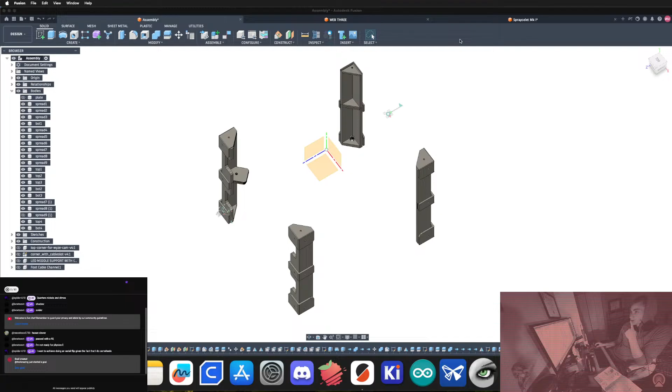You're not ready for physics. You are ready for physics. You really grasped calculus. I want to make that clear. It was very impressive. Yeah. Let's see here. So yeah, I'm happy. I'm ready. Excited to help you with physics. It's gonna be great. Okay.

I think that we're going to keep going here. So if you weren't here earlier, we've been working on basically redesigning the web from scratch based on what we've learned to try to make it sleeker, thinner, more comfortable, easier to use, all these things. Because before, I had this design that is kind of old school and outdated when you take it with all the other things that I've learned since I first made that design. And those other things just don't fit anymore.

So for instance, like adding this extra little bump here so that I could fit the trigger slot through. Now we've got the trigger slot pre-baked into the shape of it so that we can design around it from the outset instead of trying to tack it on later. And this will culminate in a new pressure vessel design that is sleeker. We can hold more fluid than ever before. You can see we're elongating this a little bit, but all the mechanisms are also going to be hidden so it doesn't look crappy. And yeah, that's pretty much where we're at today. So I hope everybody's ready for what's to come.

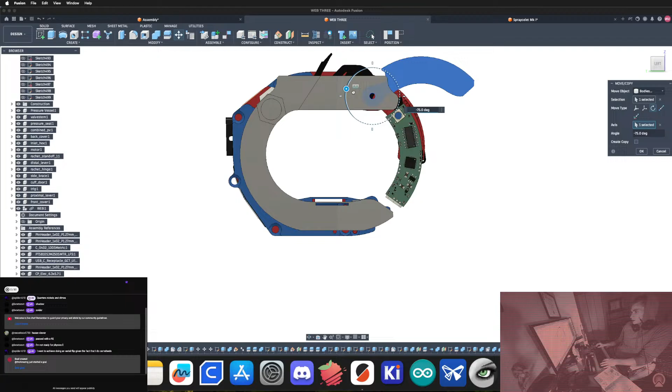So where I was before is I got the hinge working here. And I think it's going to basically be this shape, and the angle that we're able to move it to is 67 degrees, and that's a complete coincidence, by the way. Complete coincidence.

Funny you're talking about aerial flip 610. I was just talking to my parkour buddies, and we were talking about aerial flips. And I have more, I guess you'd say, gymnastics experience than the rest of the parkour guys, so I come at things from a little bit different place. But they were talking about aerial flips, which of course is the classic gymnastics move. And they were like, it's crazy how female gymnasts find an aerial flip so easy and standing back flip is more difficult. And I think that's a little bit misguided because I think both are easy to them. But the thing with the aerial flip, if you're just comparing one skill, right?

Aerial flip versus like back tuck, or if you're just comparing the aerial flip, like men versus women, right? Women are generally more flexible, and what that means... well, I'm sorry, I'm trying to turn off the preview on

enable preview. There we go. Okay, we don't need the preview on the OBS.

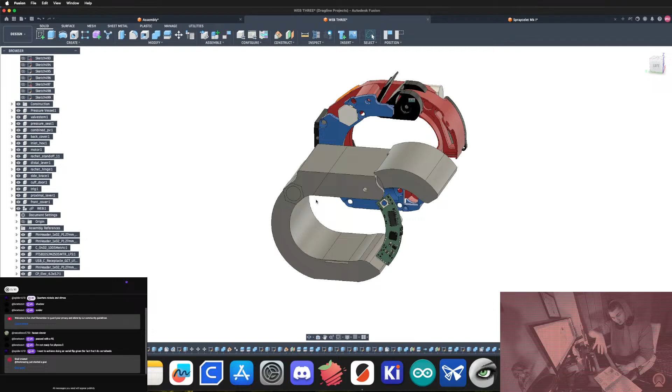Okay, so women are more flexible. And so the thing is, if you're doing an aerial flip, flexibility is really helpful because it all comes from just like a cartwheel, that leg going up behind your head, over your head to the other side. This time, instead of a cartwheel, you're not putting your hands on the ground. So it helps a lot when your leg is already halfway around to reach the other side before you even left the ground with your leg that's doing the jumping.

That's how I've imagined it, and I've never been able to do it. It's probably how I would coach it, but I think flexibility is a great help for that sort of thing. So definitely stretch a lot. Try to get your middle splits or your front splits or whatever.

No, Henry, I don't really make my own PCBs on a CNC. I could do it if I was in a pinch, but the fact is, PCBWay is cheap, it's easy, and if you're just doing the PCBs and not the components, there's really no reason to do it because it's dirt cheap and it takes just a few days to arrive. So there's really no reason to do the PCBs in-house because that's an extremely accessible service at this point.

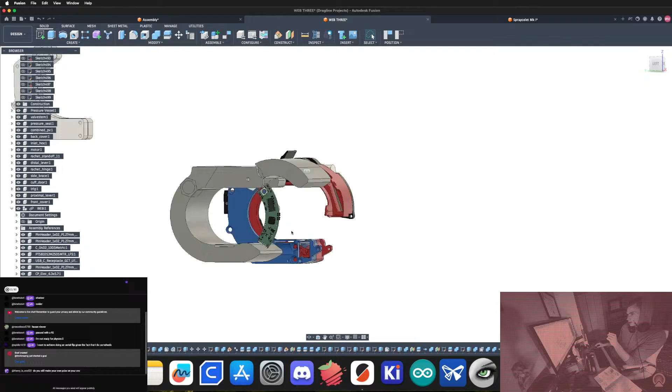All right. So enough chitter chatter, enough jibber jabber. I'm in the middle of designing an adjustable bracelet. I'm not worrying about anything else at this moment. That's it. So given that, hopefully I'll be able to print it, because this only has an hour and 39 minutes left. So we basically have an hour and 39 minutes to get this done, and then we can print the prototype in PLA, see how it fits. I think that would be really cool.

Let's see here. Let's move this back, 67. Okay. So. I sort of have to think about what is the range of motion here. You can see I've got a bunch of sketches here.

Hey, how about that? Another scholarship. Congratulations. That's fantastic. I am super happy for you. That is huge. It's like that's so huge. Crazy, like world of difference that can make. I'm extremely pleased to hear that. That's awesome. I don't have any Bambu Lab printers. I have a Prusa and I have an Anycubic, and that's it for FDM at the moment. Damn, 610, that can happen. That's why you're organizing change. Oh, man.

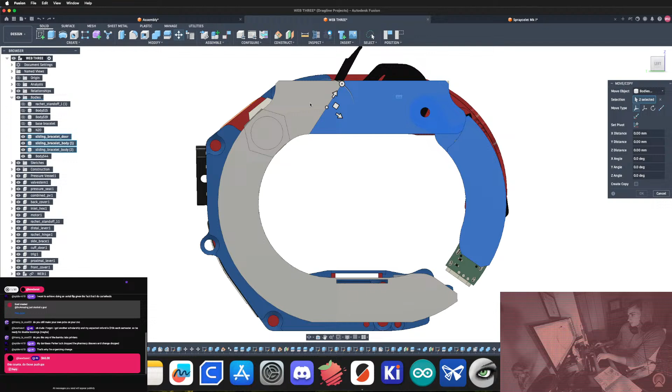Let me move backwards. I want to think here, because if this is considered the neutral position, this is what's going to fit my arm, my wrist, then we're going to need some bigger wrists and some smaller wrists. In that case, if we go here, bigger, let's say maybe 5 millimeters bigger. And let's call it... you do really need it. There's some tiny girls out there.

Holy shit, dude. Dude. Shadow. Thank you, my man. Holy cow. You're right, it absolutely does count. And I got to do those push-ups now. Holy moly. That is super generous. Okay. You got me. Everyone thanks Shadow for doing the most. Wow. That definitely counts. Okay. Forget that. Wow. Okay. Here we go.

Now keep in mind, I've already done 100 today. I'm going to put the mic on the floor next to my head. And I hope you guys can see this. It's not the best. I know that my camera is weird. And trust me, that's not my fault. Get the lighting over here. Okay, there's the floor.

Easy way out, that is true. Okay, I think you guys can see me. Yeah, this is pretty visible. 60 push-ups. Okay, I did 100 earlier, but not all in a row. So I might still have some stamina. Maybe I'm even warmed up. If I can't do these all in a row, please don't blame me. I'm gonna do 60 though. I'm gonna try to do them all in a row. Okay, here we go, here we go.

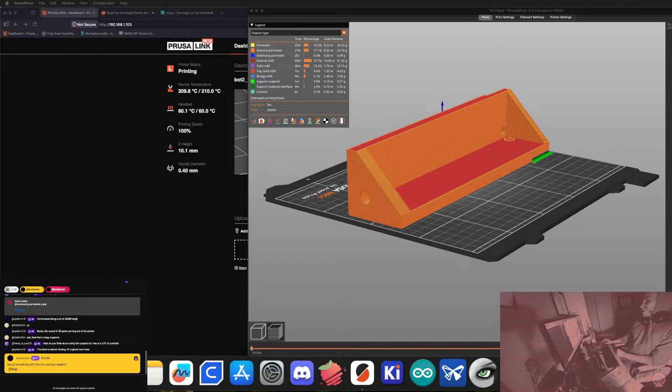Hey, Shadow, come on, man. Just because you got this scholarship, you can't be just chucking this money at me, man. But I appreciate it very much. It's gonna help a lot. And this does count towards the goal, by the way, towards the 20 dips. That's very sweet that you would say that. That's very generous. So that means $5 more until I have to do 20 dips. Oh my goodness. Okay. Shadow is making me work. I'm getting sweaty too. Oof. Luckily my AC is on. I need to turn it up. Oh, I gotta move this one back too.

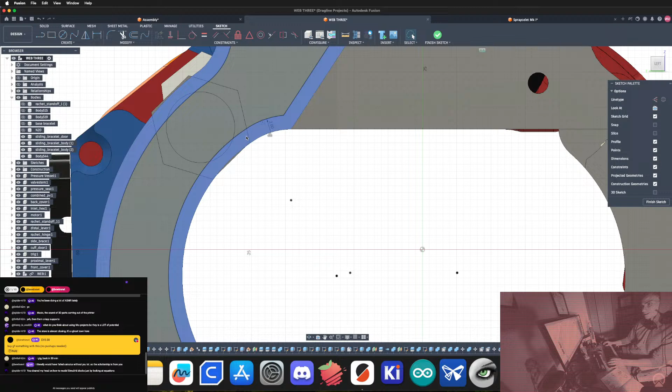You cleared my head on how to model Simulink blocks by just looking at equations and how robot manipulation is mapped to Jacobian. That's one of the things that I helped 610 with, and it was a lot of fun. I'm glad that I could help you with that, dude. And it's cool stuff too, especially Simulink. Simulink is one thing that I remember from my...

I think we first did it in my junior year, like signals and systems and introductory controls, modeling Simulink blocks, modeling systems with Simulink. And I remember being in those classes and being like, oh my gosh, something clicked. And then you get it, and any problem someone can throw at you, you can model in Simulink.

Almost any problem. That came to an issue when I started to have to deal with multidimensional partial differential equation systems, like you get with fluid dynamics, and suddenly Simulink doesn't play much of a role anymore. But I was still able to use MATLAB to write some solvers for these partial differential equation systems.

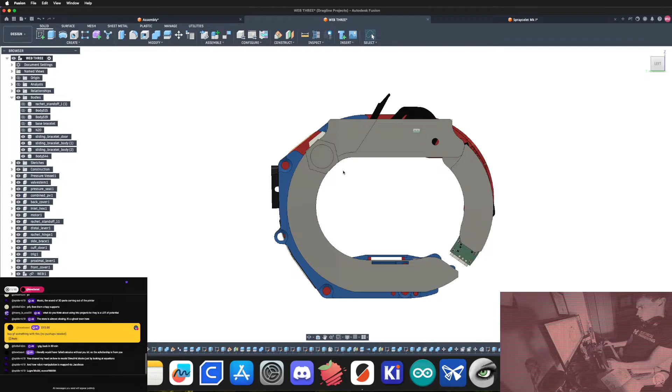I think this one works. That's much better. All right, let's see here. So, let's go back to the sketch. We've got to basically draw another line here. And this will be parallel to that. And then we alter this one.

Now that fits, that can slide past, but we have the issue where there's a little sharp part. And so we'll add a fillet, and then maybe this whole thing was for nothing. I don't know. You see that? So that keeps the shape of the wrist a little bit. There's going to be a gap here. So hopefully no pinching. I don't think there will be any pinching. There shouldn't be anyway.

And I'm going to fillet that one pretty generously. 1. Is that too big? It's a little big. 0.7? 0.7 I'll do. It's pretty generous, but I think that's what I need to do to prevent the pinching. So that compresses the top of the wrist there.

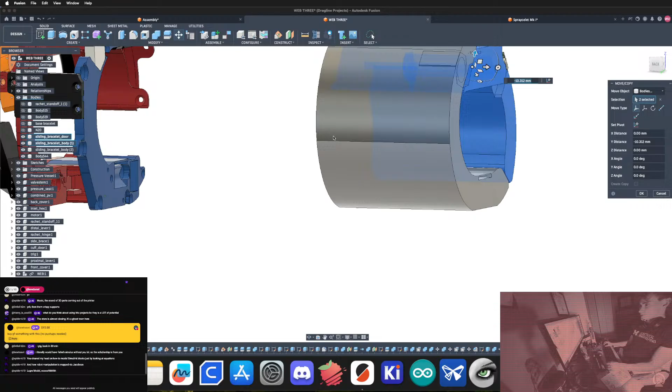So the problem is, for really skinny people, this is going to have a part poking out here. But no one's going to be this skinny, surely, right? So it's going to be like here. And then that's not too bad. And then maybe I will chamfer this so it doesn't seem so crazy, you know?

But that will come later, because this is the motor compartment here. So we're actually going to need a decent amount of space. I don't like doing the details right now, but what did I just do? So I'm going to make this one go backwards by 19. No, backwards. 19 plus 0.8. Thinnest wall thickness there.

We'll probably need a little bit more than that. But maybe not. Okay, I'm going to take this motor now. Make a copy. And I'm going to move it until it gets to where it needs to be. Like, let's say here.

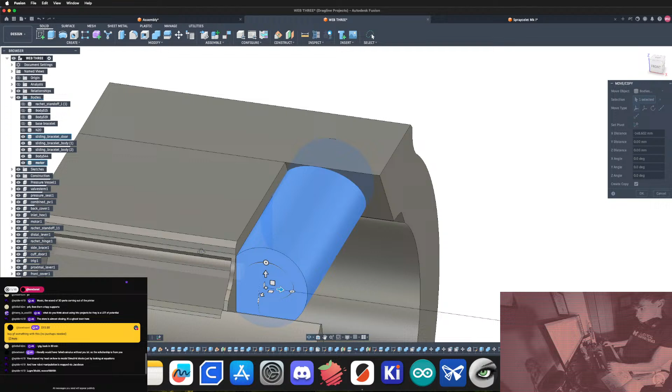It's pretty well hidden. Yeah, that's the other thing that I'm doing with this, is the motor being embedded instead of exposed. So I think that's pretty decent. Yeah, I'm a big fan of that. Does it interfere with anything over here? Not really. Yeah.

So if we make this motor go here, I want a specific number, not just a random place. So let's just say, because I don't need to actually put the motor in right now, I can keep that separate. I just, like, this wall right here, make it bigger by like a millimeter or something like that.

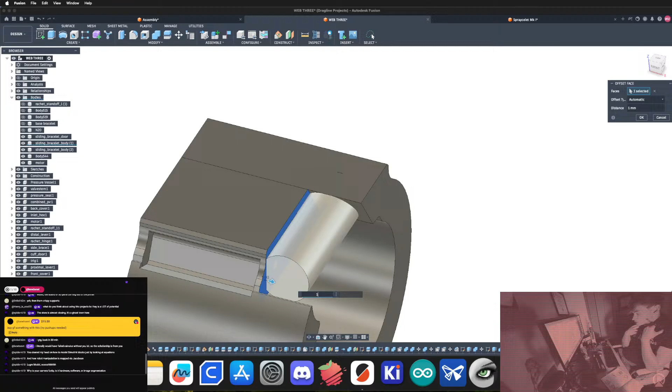So the camera's funky. It's originally green. So in OBS, I made it look less offensive and just kind of gave it a sepia. And there's these lines going across it as well. That comes from my webcam software. I don't know what's going on. I think there's like a driver incompatibility, because I've done some janky kind of jailbreaky updates on my computer, which have led some things to break. And I think that this is one of them. So we're just going to have to live with it. But I'm like black and white. So it's kind of like Spider Noir, you know what I mean? It's good, with the times, like a nice contemporary activity to have a black and white camera.

So this is now 1 millimeter. Unfortunately, I think that we might need 2 more millimeters. Can we get away with that? It looks like we can. It looks like we totally can. So let's keep that.

Because this will probably have a nice little counterbore. 6.5 millimeter counterbore. That will go down 3. And our hinge screw, maybe 2.5 is enough. And our hinge screw will be poking towards that. And how wide is this actually?

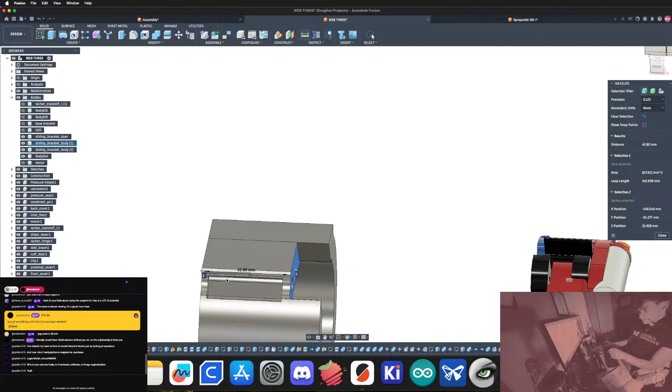Oh, perfect. Holy cow. I could not have asked for a better... Actually, it's not perfect. It's nearly perfect. But it's not the worst thing in the world. I think I have fasteners that can make this work. And what about this one? This is 3. I want to point out that this hinge is pretty overkill.

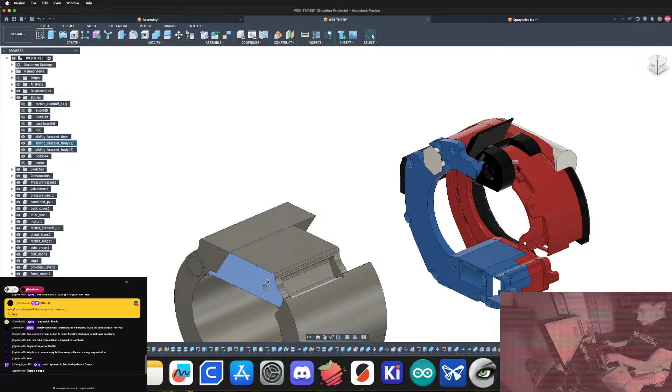But if I take this one, I need to move it back by 1 just to make this symmetrical for the prototype. And this one and this one, and move it forward by 1. Then we can have the same setup on the other side with a 6.5 millimeter wide, 2.5 millimeter deep counterbore. Booyah.

What happened to Blood Spider and Friends? Blood Spider is still kicking, man. He did like a podcast episode. Remember? And then he was going to put me on it, but I think he forgot. So I don't know what is going on there. But I think he forgot.

0.5. 2.5. Yeah. Okay, so we got space for our hinge screw here. Good, good, good. That's important. The next thing is that we actually kind of have to have the motor compartment rigidly attached to all the moving parts.

Not doing push-ups at night, that's what he's not doing. That's funny. Yeah, he's still working on his fan film. He's super passionate about it. And I mean, it looks like it's going to go well. We need more of that stuff in the world, you know, people being really passionate about what they're working on.

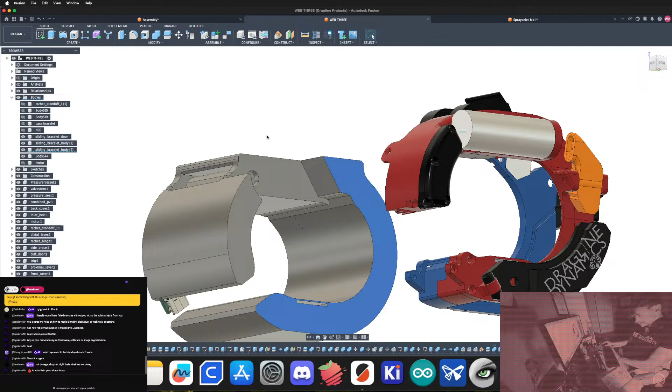Okay. So my contention is that we need to recreate this slot. And then here's kind of what I feel like doing here. Let's take this one. We take that. It's already there. We take this. Okay. So that's all going to be part of it. But then, because these are going to have to slide past each other, I want to find something here.

Okay, we're going to just construction line all of this. I got to remember to do that. It's much better practice to have your guides all be construction lines and then make the outline after you know what the shape is going to be. Okay, coincided there. Okay, so it's all coming together now. The only question is, get this out of the way. It's old news.

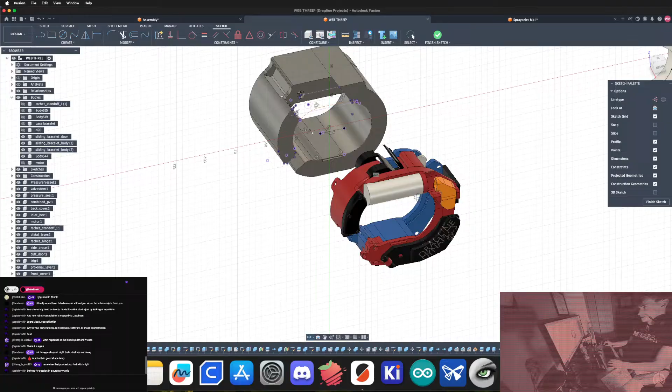If I were to get this and this and this, okay, maybe I'll trim this one. So if I were to get this and this and this, and this, and I were to copy it, paste it, and then rotate that shape around this circle, what do I get? Does it interfere? It looks like it will interfere because it's crossing itself, this line. Mm-hmm. Okay.

Now, why is this a problem? It's a problem because I'm not doing this right.

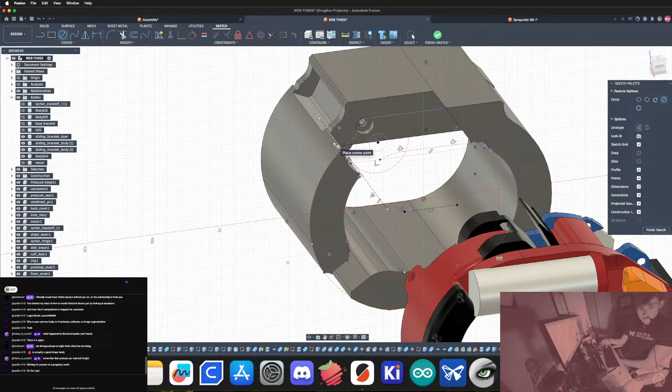I remember the podcast I had with Knight. Yeah. Those were good times. Those were young times. You know what I mean? I suck at working with people. I wish I didn't. I was just talking about this to a friend. But like, God, sometimes I don't know how to handle it. I would love to, I mean, part of it is resources, right? To be able to collaborate with people, you need to be able to sacrifice a little bit more. Because you're sacrificing for each other, essentially. And it's hard to do, you know.

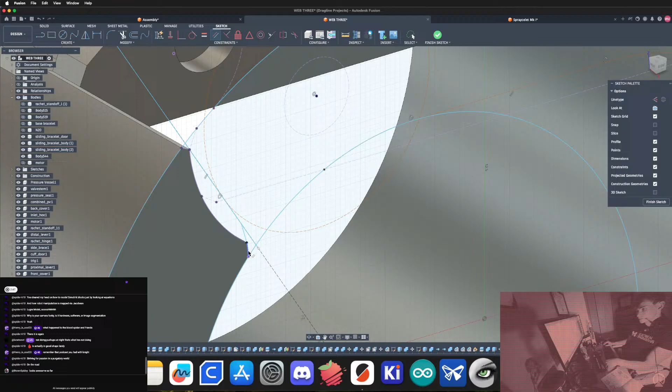One here. And that's it. Just that shape. We're going to go there. It's going to be a new body. And then we're going to combine the bodies. But wait a minute. But then that kind of limits the adjustability of it, constraining this to be a flat surface here, when really you just need these things to slide past each other, but also be able to rotate. It's like a knee joint, right? The knee is a really interesting joint.

Oh my God. Like a fry and ketchup. Get out of here. My girlfriend would love that one. She loves ketchup on her fries.

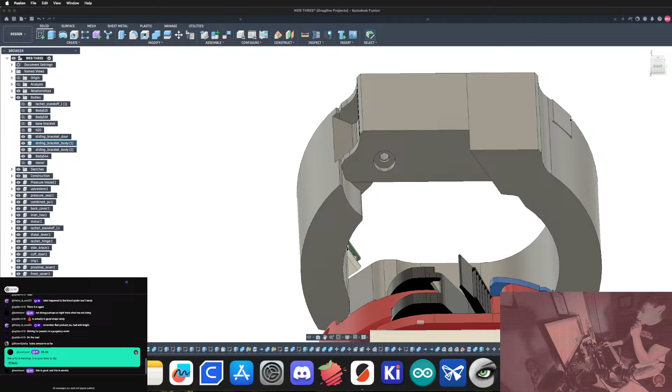This one here. Instead, I think what I want is, no matter what. Maybe I should draw this first. Okay. Should draw this first. Right here. Right now. First things first, this part doesn't slide.

Hey, congratulations 610 on finishing another shift. That is big news. It's not easy.

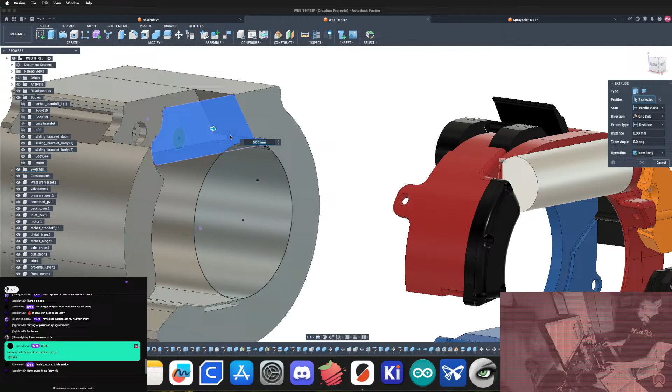What I missed here? This is part of the fillet. So if I just do a tangent arc, and then make it also tangent with this, and it's fully defined. That's the shape that I'm missing. And that's where the motor goes. So this shape is what we're trying to recover here, part of the bracelet where the motor will sit. Go here, new body. And then we will combine this and that. So now what we have, which is kind of wild, actually.

That's 16 millimeters. It would be nice to have a little bit of a pad down here, but I'll ignore that for now because there's still so much area to press down on the surface of your wrist that it might still be comfortable.

Dude. Yeah, I bet. Tell me about it. I don't know why some people are so entitled when they're customers. You know what I mean?

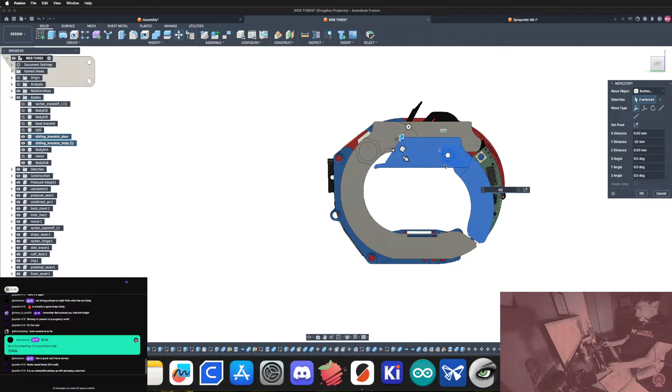Okay, so this now will slide like this. Let's say to the maximum adjustment of 10 millimeters. And ignore the PCB over here. That's sort of the shape that this will take. Also, as a result, you know what? I'm going to do it. First thing we're going to do, move this up by 1 millimeter. It's just 1 millimeter, right? What's the worst that can happen? I'm just trying to make this more comfortable. Move this up by 1 millimeter. Move this there to make it match. Okay.

Ah, you're the photo expert. Very Peter Parker of you. Love to hear that. That's very cool. Help people a lot when it comes to photo orders, literally IT support. Yeah, I bet that's confusing too because it's hard for a lot of people to understand, I bet, you know, when that technology can go wrong.

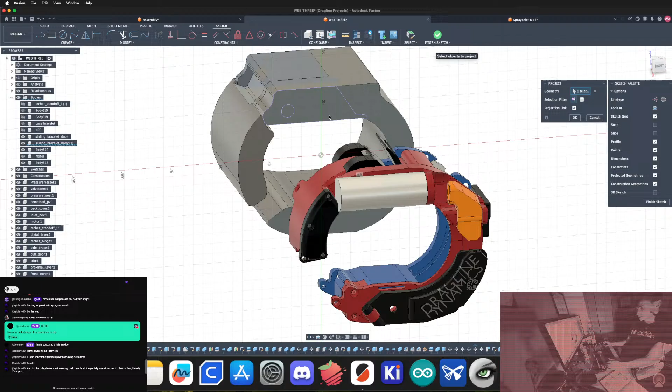So that's the surface. And if I get this and that, -1. You see what I'm doing here? 1 millimeter is kind of thin for something like this. But this doesn't have to be 1 millimeter all the way through because the motor is curved. That's kind of an advantage. So I'm just going to move this through to here.

And it's going to be a new body. New body. And then we're going to cut this body with that body. Keep the body. The word body is starting to sound very weird in my mouth. Then combine this body with that body. Don't keep the body.

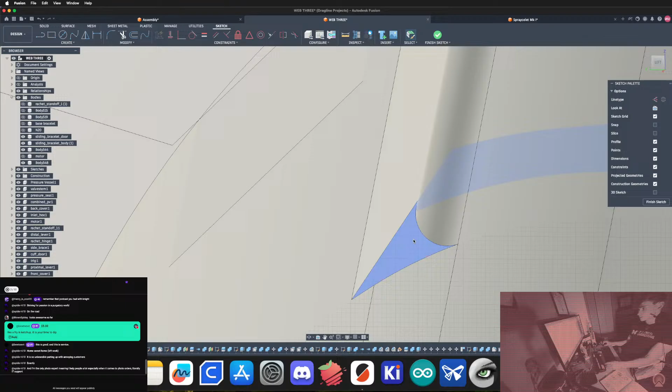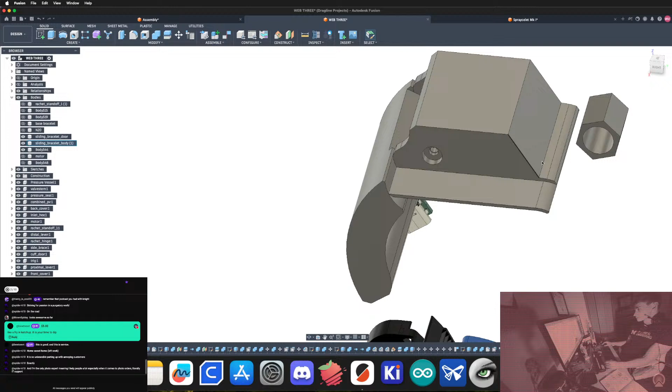Now the whole surface of the top of your wrist is going to be pressed down on, and not just the back part. The motor has to be raised up a little bit to make this happen, but nothing crazy. Nothing insane. So I think that's going to work better. Let's see what that shape looks like here. Yeah. Okay. Great. So that's that part.

What are we missing? I think we're missing a limit and a guide. So for instance, if we want this limit to be 10, and I was thinking that these two surfaces here are parallel, but I think it's entirely possible that someone may want to adjust this like to here. And in that case, we have a little bit of work to do.

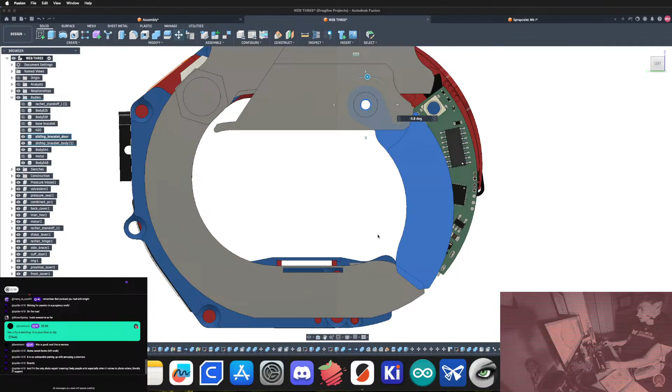So I think what I'm going to do here, because that is kind of a shitty situation for all involved, I'm going to draw a line to cut both of these surfaces, sort of going through the intersection points. And then exit the sketch. Excuse me. And then we're going to split these bodies. This one, using this tool. Okay, then we got to reconstitute this one and this one.

Shadow's killing me, dude. That's hilarious. I don't know, man. What does have me so thirsty? That's so weird, you know?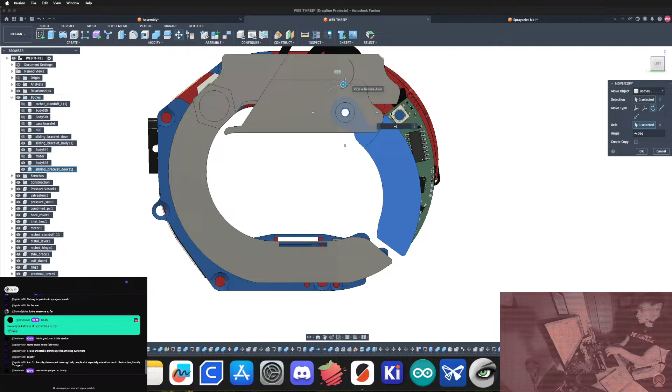Okay, so only problem is I don't remember how much I rotated this by. .8 degrees. I'm going to round that to 4, just so I know the number. Okay, didn't seem to cause any catastrophic problems. What that means, we can go back to 4. And this one, back 10.

Really interesting. So we have a little tiny struggle here in terms of how to mount this brilliant PCB that I have from PCBWay. I basically just made the smallest one I could with all the components I needed.

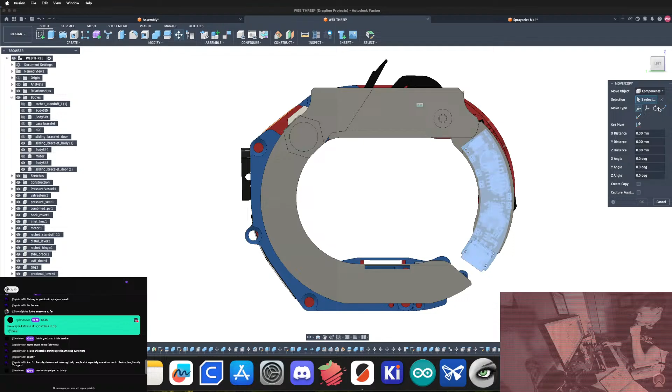It'd probably be better for this to be like up here. Even like sticking out a little bit, I think is okay. I don't think that's gonna be catastrophic for this design. Maybe like here, you know? But then we've got it sticking out over here.

So I think, we might have to do some work up here, but let's make sure first that that is adequate for the adjustment capability. And maybe we can get away with a little bit less. Let's do it that way. So I think move this one first 10. Dude. That's not bad. That's not bad at all.

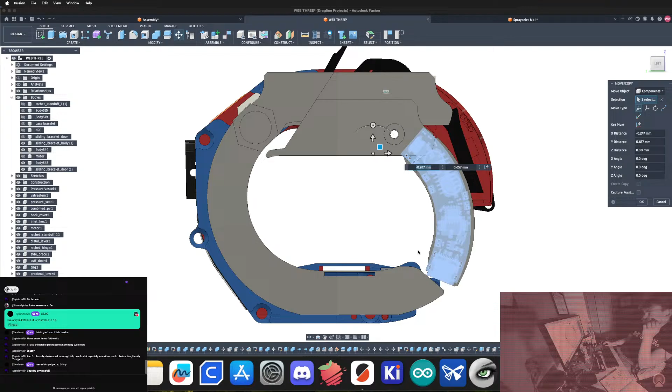It sucks that it's not the same perfect circle, you know? I did not design this PCB perfectly. But I did a really good job, I promise. I mean, this is okay. What's gonna suck about this is this nice smooth surface is gonna be a little bit interrupted. But it's probably not gonna be that big of a deal. What's going on up here? Although, wait, think, Mark. Okay.

What also sucks is that the LED is now hidden behind another part. But maybe it doesn't have to be. Oh. Let's see here. Doesn't have to be. Could be a little opening there.

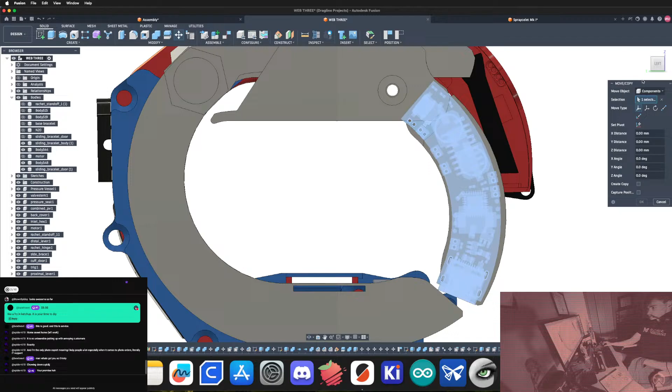I'm not going to make a space for the PCB here, but I am going to make it the shape in which the PCB can fit, if that makes sense. So the first thing to do is to, I think, laterally move this PCB to a place like here. So that's sticking out there. But don't forget, it's not that big of a deal.

I think 3 is a magic number. Yeah. Oh. All right. The PCB is pretty snug. Yeah. I think any way you look at it, everything about it is pretty snug.

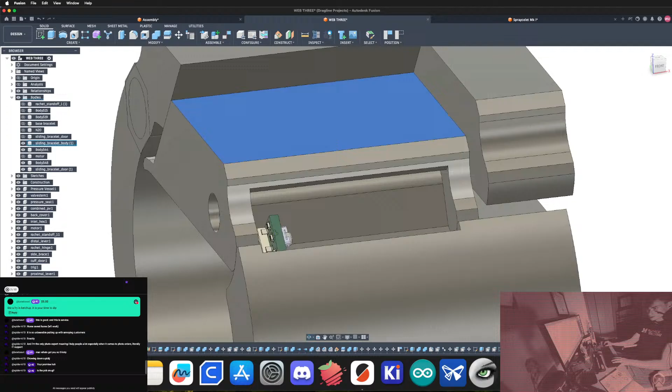So now we have a situation where, keep in mind, the PCB is not in this current formation interfering with this other part. So I'm going to erase that, and we're just looking. Let's just isolate this, and we'll just work on this part. Okay. Remove that.

And so we're just looking here how to get this PCB to fit properly in this part. And I think what we're going to do is keep it simple, stupid. We're just going to take this shape,

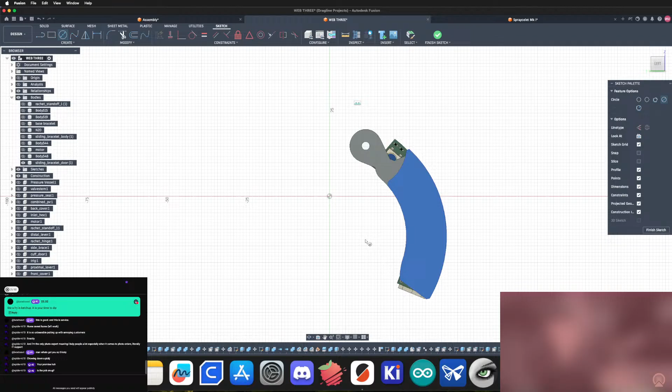Fusion 360 would respond to me. That would be quite nice. It would be nice if Fusion 360 responded to me. What happened to my camera? There it is. Okay. What the fuck?

What circle am I looking at here? This one and this one. Pretty tight.

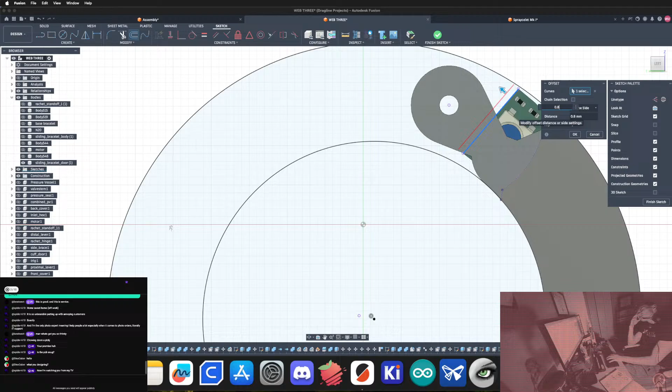I need to project some shapes. Although, remember, you are not building space for the PCB. You are just making the shape more accommodating to a PCB type shape. I'm conflicted. Okay, we're going to do that. We're going to do different arc.

I'm designing the Web 3. That's what I'm working on here. Going back to basics, but also essentially just taking everything that I've learned over the past year and change about designing this device and then applying it to said device.

Wait, that kind of sucks. Hold on. Hold on. Get rid of that. This really should be coincident. There. That. There. And all this crap. Tangent arc.

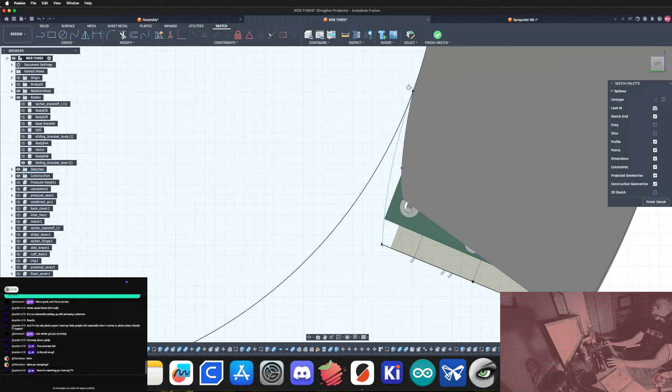So that's tangent, but they also need to make them concentric. And that one and that one. And as for this one, new tangent arc from here to here. Here to here. That's probably good. Like, that's probably good. Let's go covering this PCB here. Does that even make any sense? I'm gonna go with yes.

New body. What we're gonna do is we're gonna pretend this was the plan all along and never have anybody know what this looked like before, to hide the fact that I made an oversight on the size of the PCB. But then the problem is we gotta make it look natural. So hopefully it looks natural in the next couple scenes. It might not. It might not.

Okay, then what I'm going to do, combine. This already looks a little like shit. What happened here? No, really, what happened here? I thought this was... Did I miss something? Oh, I just forgot to extrude part of it. Here. Okay.

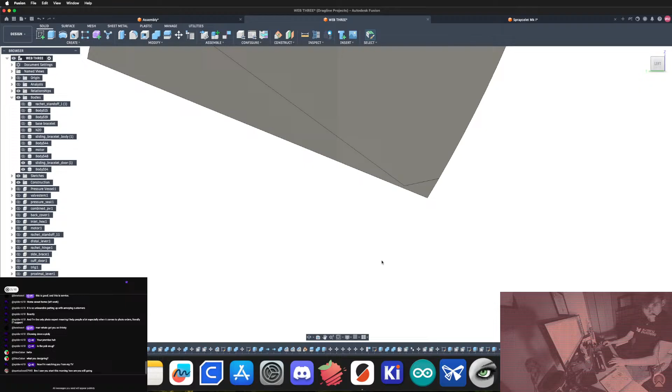I had a pretty sizable break in the middle of the day. So that's why I haven't gotten as much done as you might expect for someone CADing the entire day, where I did some parkour. Go check my Insta story. I made a pretty big jump today. That was kind of scary. But, you know, you just turn your brain off.

And that's that. Did I keep the tool? No, I didn't. Oh. Forgot about this one. Okay. Select that one too. And that one. Hello. This tool, that tool, and that tool. All together. Wait. Okay. Target, this one. Tool, this one. And that one. Whoa, bro. What has happened? Okay. Target. Tool. Tool. Done. Am I tripping? What the heck is going on? Okay. Accomplished a few things here.

I don't like this. We got to make it look natural, remember? So what that means,

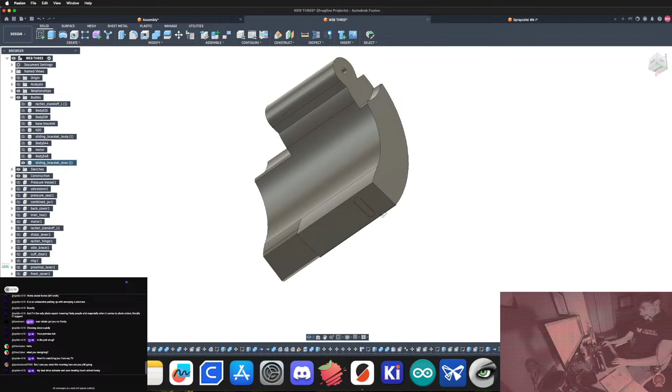Auto leveling touch arrived today. Ooh, is it the BL Touch? I have such fond memories of BL Touch calibration throughout my early years of grad school. It's like I was working with the BL Touch every goddamn day. And it would get so sticky, and then it would break and have to be replaced, and we had to put a cover on it, and then we always had to place the cover on the BL Touch before it started printing, because it was printing sticky material.

Okay, and once again, this is not looking very natural. So we got to fix that. Got to fix that big time.

BL Touch clone. Amazing. Yeah, those are cool. Although, none of the printers that I have now use them, but I kind of remember them being pretty standard. Do you think that's going away? I mean, you obviously just got one.

Okay, I see what's going on here. I'm going to need to do a tangent line.

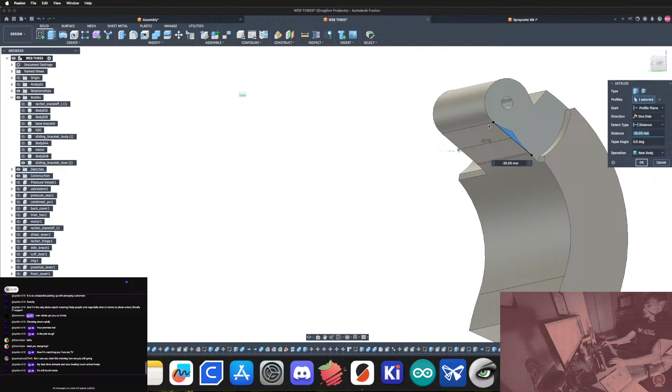Like, I think that the printer I have now uses intrinsic force sensing on the stepper motors. No, I'm dumb, sorry. It has a load cell. That's true, the Prusa Mark IV has a load cell. It's extremely... Did I do this right? What is happening here?

Whoa. What is this geometry? What are we doing here? Okay, I kind of get it. Only thing I can presume here is that we need an arc to go from, what am I doing? Just to fill it. Gosh. No sketch. No sketch today.

Oh. We're getting some buffering in Fusion. Undo. Oh my god. Why do I even bother?

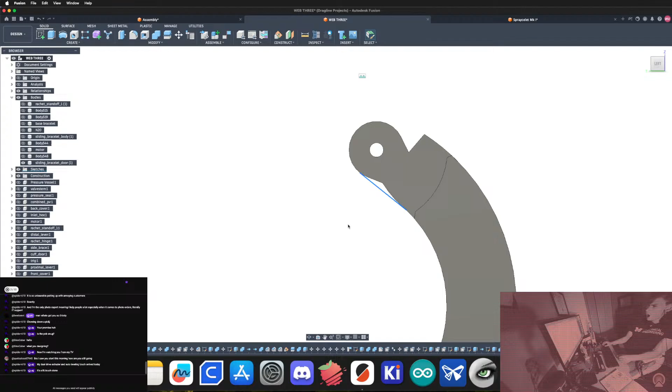We are finishing this sketch, going back to before it was ever created. Deleting it. And thinking critically about our life choices. So we have a few issues here. I guess maybe I'll go for the first issue first.

Start at the very beginning. A very good place to start. When we read, we begin with ABC. Sir, sir.

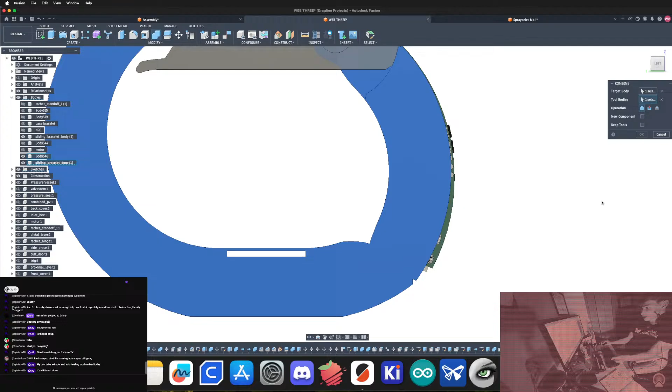Okay. 1, 2 there. Okay, fills that hole. I mean, so the farthest I expect. I don't even know, where are we? We are downward, I guess. We are down here. I'm thinking, remembering how we wanted this to be -4, which means that we now split this body with this body, keep the body, okay, and

10 millimeters, that looks like trash, doesn't it? I don't hate it, but it's just like, why? There has to be a simpler shape here, you know? What am I missing? I'm missing something so obvious. If we get the arc. Okay, we'll just make a 3-point arc between that edge and that circle. Have it be tangent to that, and let's make it tangent to that. Failed to solve. Why? Why failed to solve?

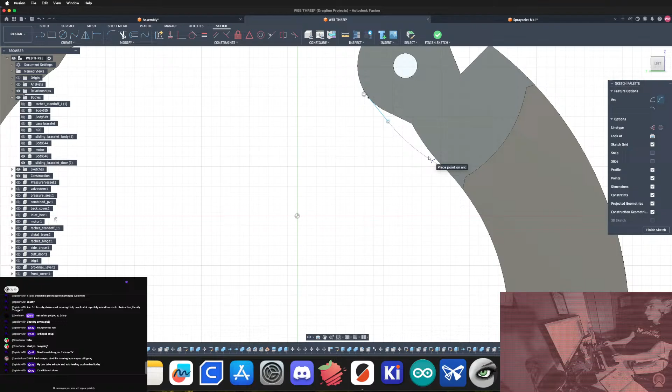Do we need 2 arcs? I guess that's what that would mean. We need an arc and a line. Is what that would mean, right? Okay, line, boom, arc, oh, okay, and then this and this, tangent. Sure. Sure. That's probably the greatest good I'm ever going to get. It's a little bit of a sharp turn. It might not be a big deal.

Then, yes, I'm sorry. I'll just wait for you, Fusion 360. No problem whatsoever. I'll just wait for you.

And play with my Spider-Man Pez dispenser. Which is the coolest thing ever. I want to put some Pez in it. That's what I want.

Okay, so what we have up here, this shape is very not natural. So I'm just gonna real quick, once the buffering is complete, of course, select that line that I just made and delete it. And then once I've deleted it, like this, I'm going to draw a new line. And that line is going to be tangent to this circle.

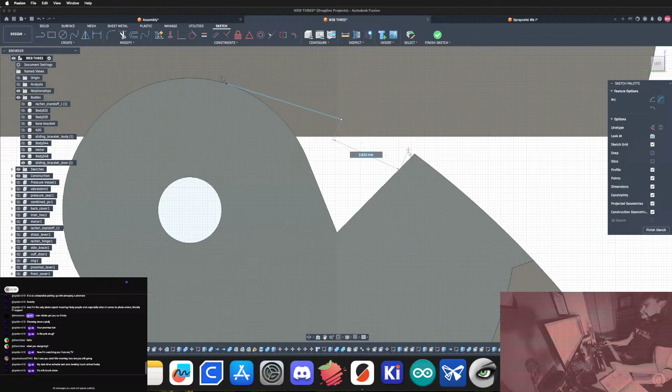And once the buffering is complete, now I can draw a new arc that is tangent to, come on. There we go. I think we got to quit because every time I draw something, it's like, hold on, let me think about this. Personifying CAD software is a very unhealthy thing to do because it's so easy to get yourself thinking that this thing is out to get you with how much it crashes.

Okay, we have done nothing except make this a little better. And I'm going to get this chamfer here. One. Whoa. We're not doing a two distance chamfer here. We're doing an equal distance chamfer. Okay. Okay. Now what I want to do, take this, cut it with this, keep tools. Then we move this 4 degrees, rather, plus 6.7. And we cut again.

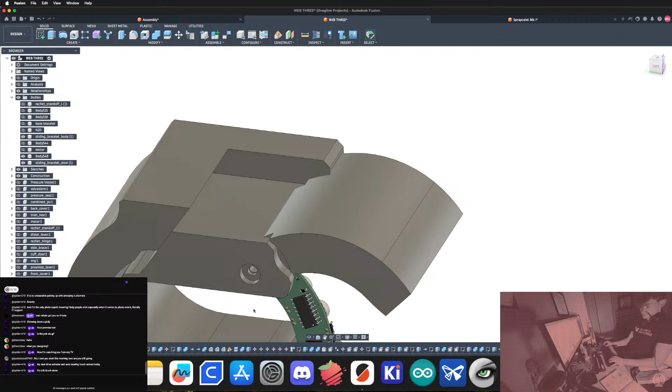The other thing I want to point out is that this is now interfering over here, which of course is a problem that I have had many, many times. How do we solve that? Great question. But don't think too much about it, we got 12 minutes left. Okay, we're certainly not going to make it 12 minutes from now. But let me see what kind of magic I can work. I haven't even done any ratcheting stuff.

Okay, let's move this back down. -6.7. And let's move this up. Not those two. This one up to its neutral position. 10 millimeters.

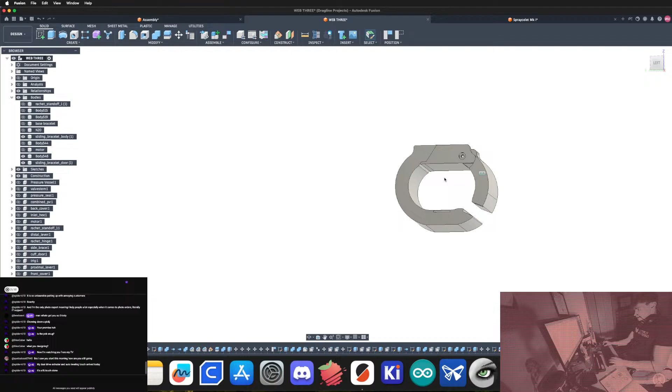Okay. All right, so we're back to the way that this is supposed to look. Nice, very good, very nice. We have a problem.

Select these two here. Maybe just this one. Let's not focus on this one. We'll just focus here. And we're going to set the pivot to, oh, for fuck's sake. We're going to set the pivot to here. And I'm going to rotate the pivot between here and here. Great.

Oh shit, I pressed the enter button. That didn't do anything. And we're buffering, and we're buffering. Fusion 360, I think, needs to take a nap.

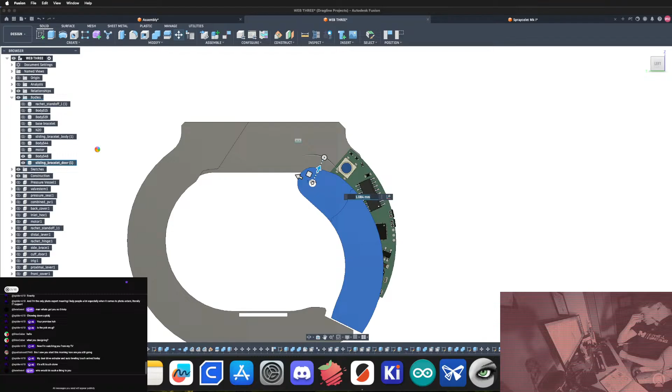No. We gotta set the pivot. Set the pivot to this point, rotate the pivot. We got to measure an angle, measure between flat, slanted. Okay, now I feel like we have it. Shit. Save that pivot. Because now, if we rotate this -4, oh, come on. You don't recall your, are we serious? Okay.

Okay. Select this. Set the pivot. No, not that pivot. Set the pivot. Done. Then, no wait. Set the pivot. Rotate the pivot. Measure the angle between here and here. You got the pivot.

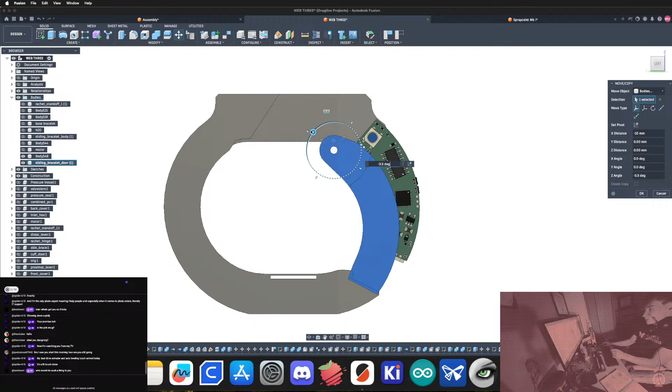So if we go -10, and then we go -4. Are we? I think we're matching up, right? We should be. I'm pretty sure we are. All right. So now, see, that's obviously not interfering with anything because it's way lower. But I think the problem will come when we go way higher.

So we bring this back to 0. Bring this back 10. And we go over here. Okay, and so this is an issue, first of all. There's interference there. There's not interference there, of course. 6, 7. Okay, now I've completely lost the...

Think. We got to think here. We don't want this to interfere. It's interfering right now. We want it to still rotate. We want it to still rotate. Don't we? My brain is not braining. Here's what I'm going to do.

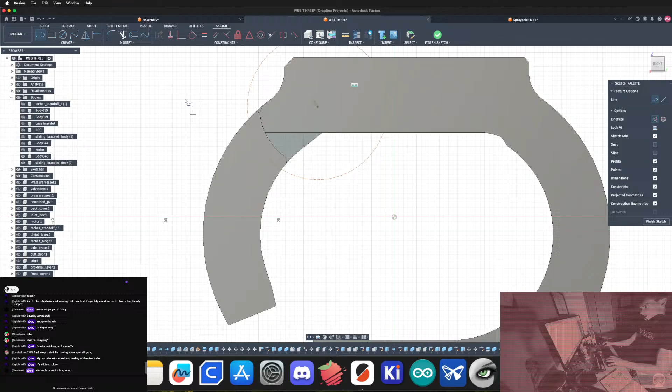Can I get this shape? Okay, offset this shape by like 5 millimeters. Ballsy, I know. You know what? Strike that. We're going to draw a thing. Okay, where's the pivot? We're going to make it look nice, right? That's all that matters. Here's the circle. And we're going to have a tangent line to the circle. That's how we make it look like this whole thing was on purpose.

And then, that's it. No. And then, okay, we gotta wait for the buffering. I love buffering, yes I do, so get me a big old bowl. Rise and shine, it's buffering time.

Okay. That there, make this parallel. And then all we need is adequate clearance. So this is going to slide. Now, we know that. But then as this circle moves down 10 millimeters, this is the geometric solution here to my problem. Why is this perpendicular to something? This and that are parallel, which means this circle, whatever it is, is going to be over here.

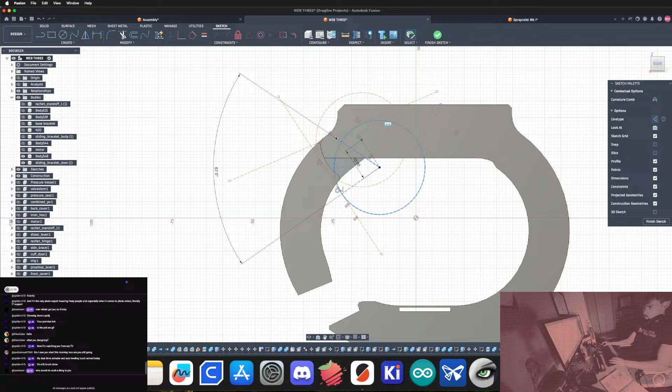And we also know 6.7 is the number of degrees from here to here. These need to be coincident. Okay, so that line is going to end up over here after rotating. And that's going to be at the bottom.

I wonder. If I take this, and this, and this, and this, and I copy them, and I paste them, and I see where those are going to be in relation to the other ones after rotating 6.7 degrees in relation to it.

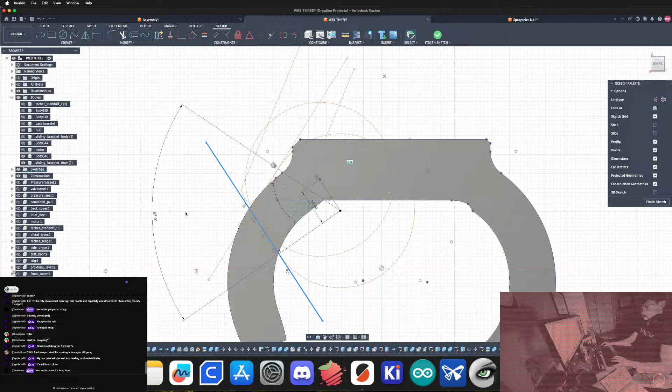I hate to cut out so much material, but it's kind of necessary. And it's going to be okay, I promise. Great. Okay, now we test this. I do want to add some chamfers, though.

This is cooking. So the reason why I made that cut there is so that these parts wouldn't interfere in any configuration that they might end up in, which is quite a few because they translate with respect to each other and they also rotate with respect to each other, which has been so annoying to keep track of what is going to interfere with what. So what I'm trying to do here is get the shape at the outset, and then when I make the minutia and the details, that is not as much of a concern. I'm trying to change my strat, in effect.

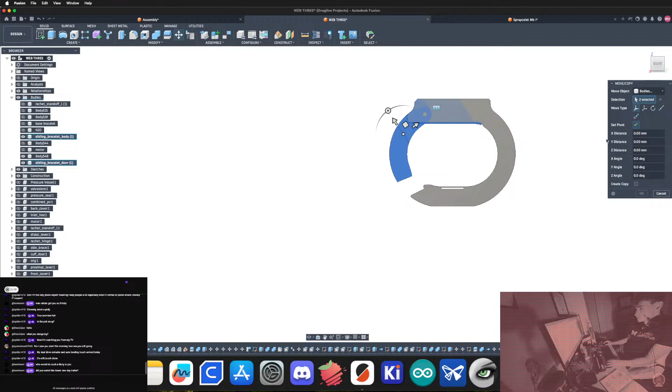Great. Then there's the question of translation. Set pivot. Ooh, this is now parallel now too, isn't it? Okay. No interference on this side. And no interference on this side. And now let's do the full 10 there. Because we got rid of the circuit board, we don't need to look at that. So then it's about, in this minimized translation, is there rotation interference? Let's find out.

Ooh, wow. That just barely cuts through the noise. 6, 7. Hey, it doesn't interfere. My math was correct. This is big news. Big if true. And it's obviously the minimized configuration. So if we move it up, oh, come on, buddy. You're not that guy, pal. You're not that guy.

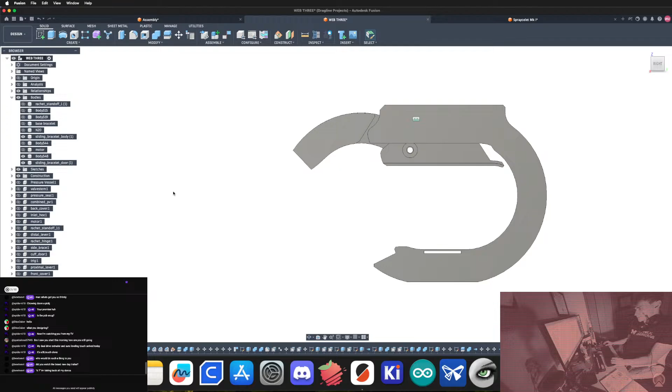Yeah, we are going to be just fine. Okay. Let's go. Let's get rid of the move. Let's go back to neutral position. Go back to neutral position. Good. Great. Wow. We've really done it. 6, 7, like, oh my don't.

It's 67 degrees, Shadow. 67 degrees is the key number for the angle at which this door needs to open so that a person's wrist can comfortably slide in. It was 66.8. I rounded up, but it's not my fault. I just wanted a nice round number so that I could remember it. And it's a very memorable number. So this serves a utility, really.

Anyway, did I watch the Brand New Day trailer? I think there was one. Was there one that came out in the last like 2 days or so? Because if so, I didn't see that one. But wasn't there one that came out like a week or two before that? Because I saw that one, and that was dope as hell. Really excited. And then the newer one came out, and I'm kind of like, I really don't want this movie to be spoiled for me. Because I feel like there's still so much that we don't know about it that it's going to be hard for me to piece together the plot of the movie before watching it, which is what I want. I'm aching for an authentic Spider-Man movie theater experience, you know. That would just be a dream come true.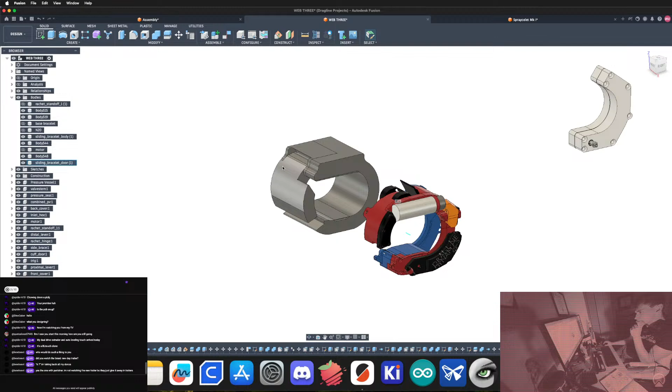It's triggering. You don't like that trend. Man, the Artemis astronauts were doing it, you know? Maybe my sense of humor is a little young for my age, maybe. Usually a big yikes. But I like Seinfeld. That's a damn funny show. And that's for millennials slash Gen Xers, you know? I grew up on Vine. I feel like 6 7 would have killed in Vine. Anyway,

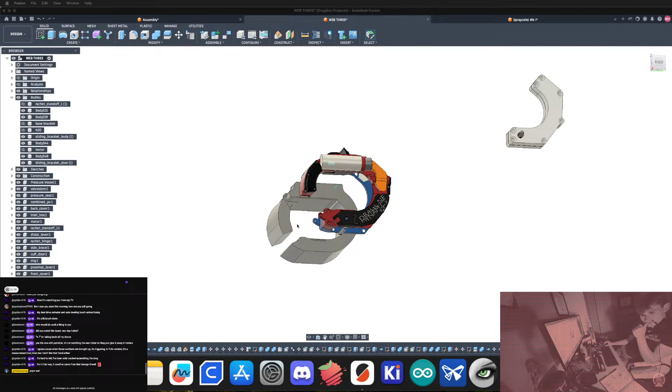Yeah, I do think that this is sleeker. It could have came from that George Orwell. You spelled it wrong. It's spelled like this. All right. I feel like I've got a really good start here. Like, really good. Big Brother 1984. That's right. Okay.

I think I should probably take a break from this because I'm going to need to deal with this other project here. Oh. So I think before I go, oh, Fusion 360 is buffering again. We're buffering again. Okay, this print is done, so that's good. I can start another one that has the brackets included. There's the brackets included. And this is for my new printer enclosure, by the way, that I am designing based on the very classic Lack enclosure.

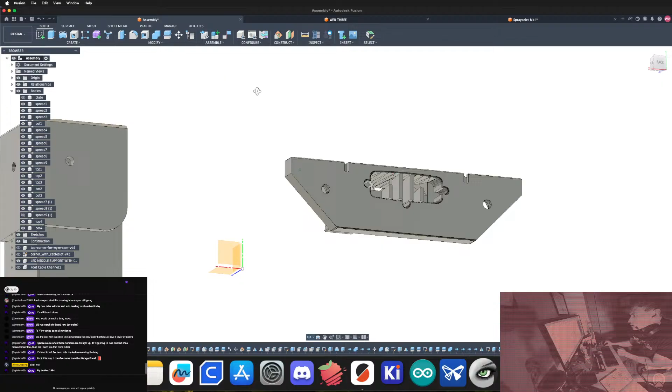Was there something else I had to design? There was, wasn't there? Yeah. I don't know what this is. But I'm going to copy this. I'm going to take this one, get this body. So I know a couple things need to be done with this because I have a thicker plate on the top, so I need to make this shorter by about 1/8 of an inch. I'm just basing this off of this, which is maybe not the best idea.

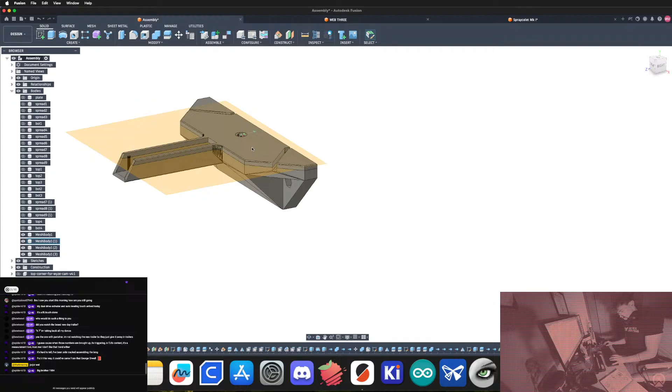So like this, I like that as a cable channel, but I'm gonna need to go minus 1.2, no, minus 0.21, what am I saying? 0.125 inches. And we're gonna cut it here. We don't have to deal with this or this or this. And I'm gonna cut it here. So we don't have to deal with this because that's unnecessary. And we're gonna cut it here. Don't have to deal with that because that's also unnecessary. And I'm just gonna fill in this space. So no one will ever know. No one will ever know what I did.

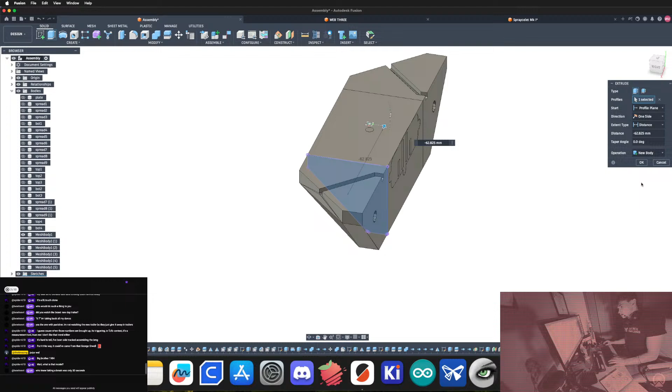Intersect, bang, bang, bang. No, it was selected already. Go here, call it new body. But we still need this circle. Who knew taking a break is only 30 seconds? No, in fact, the break is going to be much longer because I certainly need it. However, I got sidetracked and I need to get this print going. I'm trying to have like a no downtime on my printer, you know, because there's a lot of things I have to do, including the Charlotte orders.

Bang. Sure, whatever. Why is this only 4 millimeters? Is that right? That doesn't seem right to me. This should be 5.65 millimeters. And what am I? Is this supposed to be tapped? No way this is supposed to be tapped, right? I call bullshit on this needing to be tapped. Instead, what I'm going to do, this is a little bit trickier than I thought it would be. I could tap it, and it actually wouldn't be too bad. But I just feel like it doesn't fit with the rest of the design.

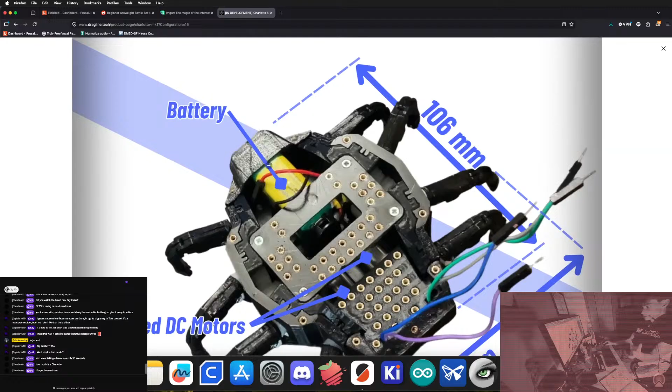So there's a base configuration that has just motors. This is nice for you if you want to add your own battery that will somehow fit in here, or if you maybe sit on top like my earlier prototypes did. This is a very nice, lightweight, very adaptable configuration. See, there's a lot of screw holes here. You can add whatever hardware you want, motor drivers, electronics, controllers, that sort of thing. Then there's the battery configuration, because I found this is actually quite nice. Like, this battery doesn't fit in the original base configuration, but does fit if you organize it like this and put the motors over here instead.

So this is sort of like, hey, this also works really well, so I'm just going to also make this one, and I'm including the battery now with this one, because I think this battery works very well. It's like an upregulated single cell LiPo, upregulated to 9 volts. Jury's still out on how long it lasts, but at the very least, it's a decent starter battery for this to get your project started. So I'm including that with this.

All orders are made to order. Lead time of 30 days. These are the colors that I have, although yesterday 610 wanted purple, and so I decided to buy some purple high strength Polymax filament. That's what all the parts are made out of, high strength PETG. And so I got the purple, and we're gonna make his in purple, even though that's not one of the ones that I currently offer.

But once I get the pictures, I'll probably add the color, because I'm interested in people buying different colors so that I can make the different colors and then have pictures of the different colors to actually show people what it looks like. You know what I mean? And independently, I might make my own colors just for fun, but obviously I don't have the time for that right now.

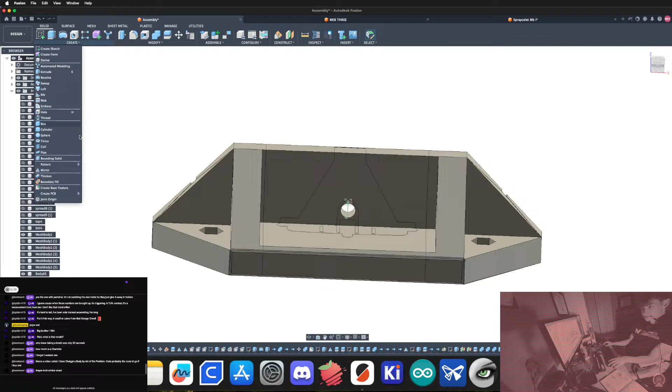Is this good enough? Probably good enough. Now we have to figure out how big these hexagons are so that we can recreate them. 4.677. Don't listen to me. You're going to get upset. 4.677. And do an inscribed polygon. We'll do 4.8. Sorry, I forgot all my geometry. We need a circumscribed polygon. No, we need an inscribed polygon. I did a circumscribed polygon. Okay. 4.677. This seems small. Did I measure the right edge?

Tiny solar panels. I never tested tiny solar panels with Charlotte. There may be a way to do it. The energy consumption might currently be too high. Nope, that is the right surface. But I think it would definitely be interesting. At the very least, you could do solar panels with a battery, because Charlotte's obviously not always going to be moving. Sometimes she'll be standing around.

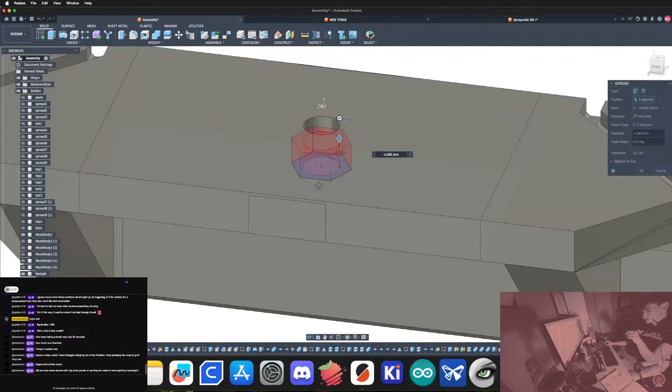Obviously, I envision for her to be like a civilian reconnaissance robot in the future. Obviously, I'm not interested in giving more power to the government. But yeah, oftentimes she might be standing around, so you can absorb sunlight, charge the battery, and then use the battery to walk around. I think that would be interesting to see if that's a sustainable solution. Yeah, it would be cool.

That's the thing. I've developed Charlotte up until this point, and I will develop her more. For instance, I've been talking for a really long time about a reinforcement learning algorithm that I've been thinking of. That's probably what I'm going to do next with Charlotte. And then I can start to figure out her native controllers and that sort of thing. The stuff that, once Charlotte is a full robotic system, will be included. And then it's also keeping it relatively affordable, disposable.

I know that for your typical hobbyist like you guys, $200 is not disposable. But if I'm thinking about a fire department, they need robots for sensing. Basically just getting sensors places where humans can't go. Am I keeping tools here? I don't want to. Yeah, I am. I'm a fool. So where Charlotte could be useful there is she could walk into a place with some sensors.

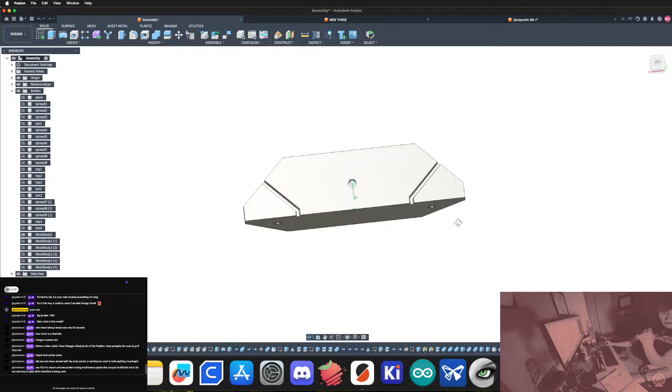Then she doesn't have to come back if she's cheap enough, you know. There's a real advantage there. I visited the New York Fire Department, and they were talking about how sometimes we need to see what's going on somewhere. We just chuck a drone. We have a drone with sensors. We just throw it in, and we never get it back. It's one of those little tiny cheap ones.

You know, there's just so many ideas to uncover, and it makes me excited. That's what research is all about. It's about evaluating ideas. Yay. That's what I love to do. I love to evaluate ideas. Is this a good idea? Is this a bad idea? Oh, well, I don't think it's a good idea. Oh, well, I don't think it's a bad idea. Blah, blah, blah.

2, 3. No. Okay. I think this will be able to be bridged. So this is our next part to print. Yeah.

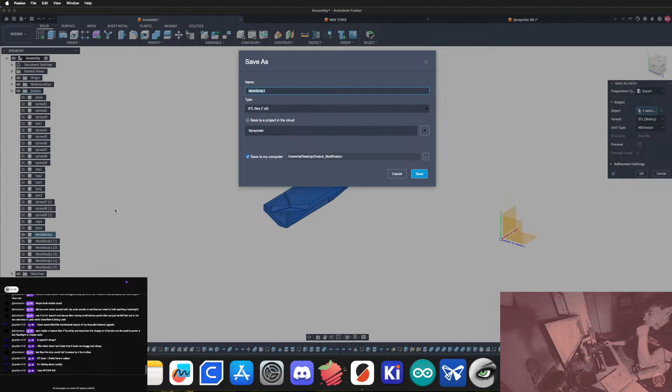Okay. Great. Let's get this guy going. We're going to need 4 of them. I think we can do 4 at once. Perfect. We don't want any support. I think they can bridge this.

A radio probably wouldn't work. And maybe a feature that if found by someone lost, the charge on Charlotte can be used to power a tiny flashlight or maybe radio. I don't see why a radio wouldn't work. You mean like from a solar panel? I feel like there's no reason why a radio couldn't work. Radio signals don't have to have a lot of power. Maybe to travel far they do. But yeah, I don't know much about those signals.

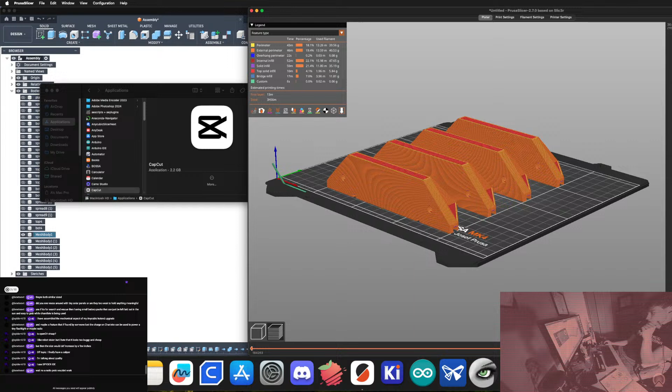What signals require the most power? There's of course also cellular network. Maybe that would be better. That's actually one of the things I want to do, is connect Charlotte to a cellular network so they can control her from anywhere. That would be really cool.